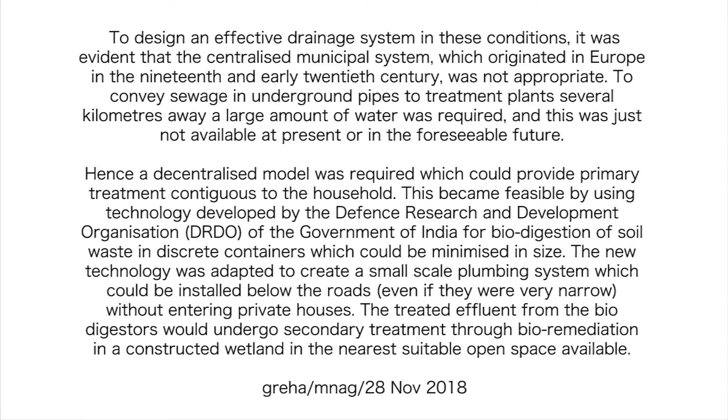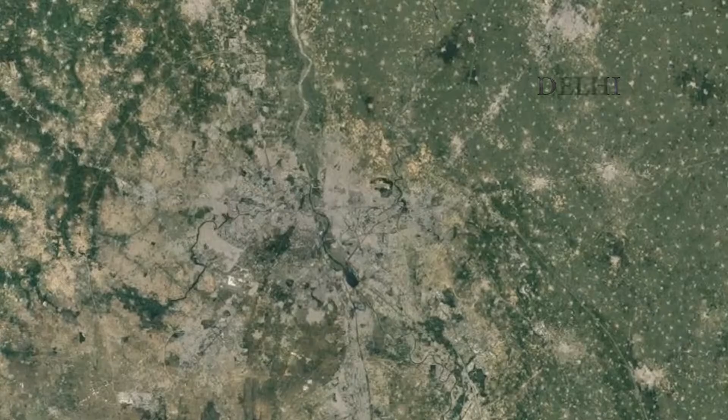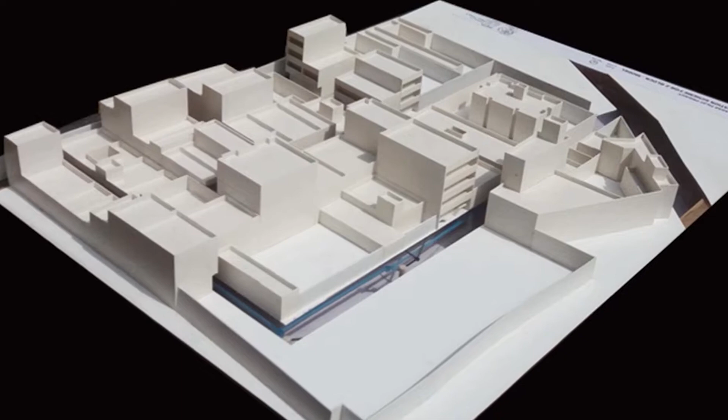Aya Nagar is located on the southwestern edge of Delhi. Z Block is a dense urban neighborhood of Aya Nagar, housing about 300 families. The neighborhood was surveyed and accurately modeled to inform the residents about the scheme.

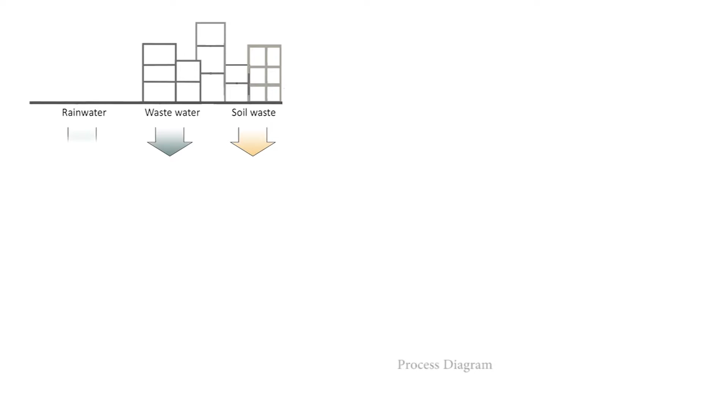The process of water cycle management starts with soil waste treated by biodigesters, discharging to a grey water main, with secondary treatment by a reed bed before recycling.

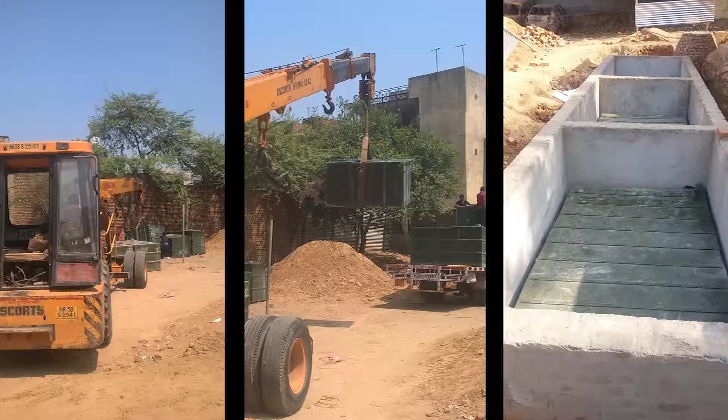Biodigesters are installed under the roads. These are specially designed and fabricated using a patented system developed by the Defence Research and Development Organization of the Government of India. This technological innovation allows for a decentralized distribution of biodigesters with minimum water requirement for flushing.

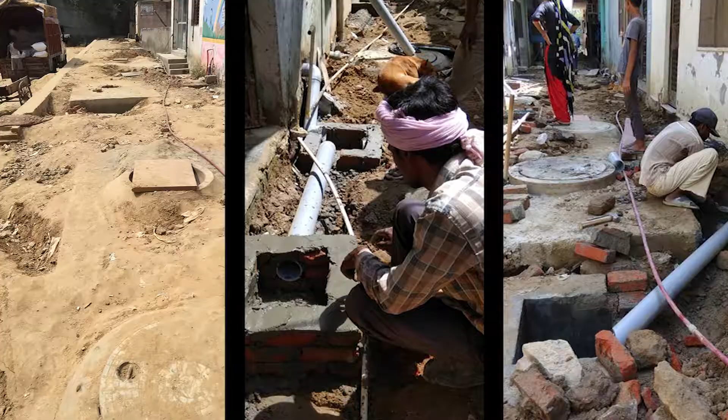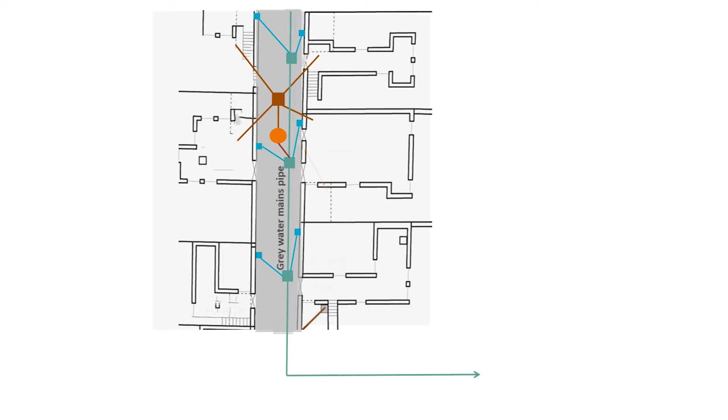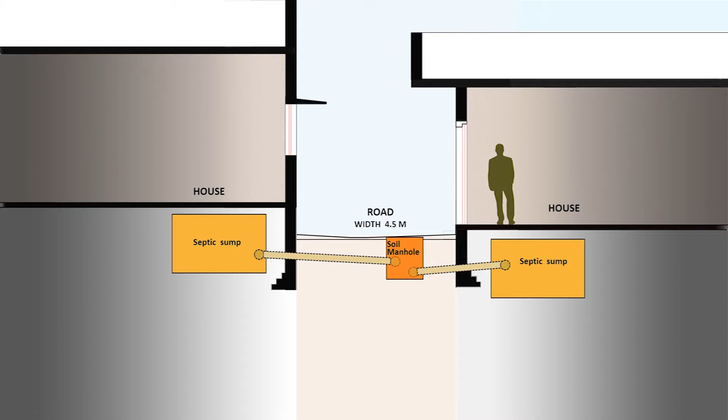Septage is treated nearest the source, and treated effluent is discharged to a grey water main connected to a reed bed before recycling. The entire treatment system is accommodated under the narrow roads, maintaining a domestic scale.

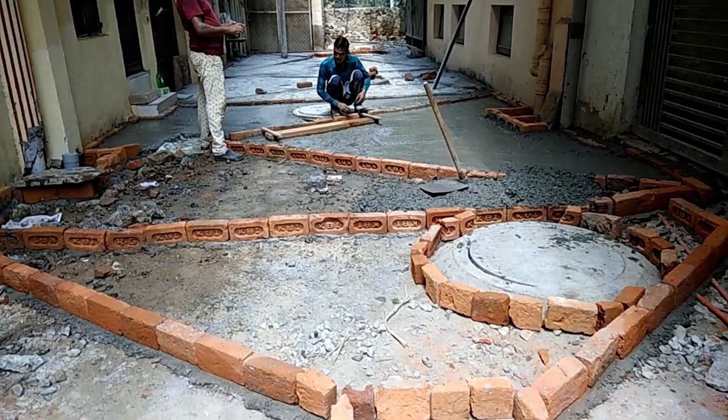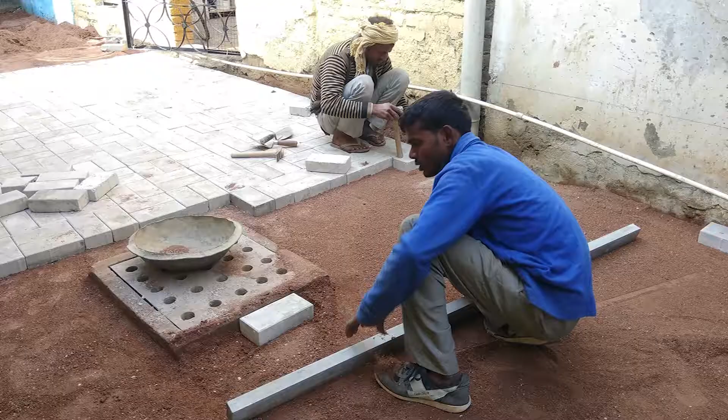The roads are repaved to harvest rainwater along with the surface water. Concrete block paving completes the renewal of the streets.

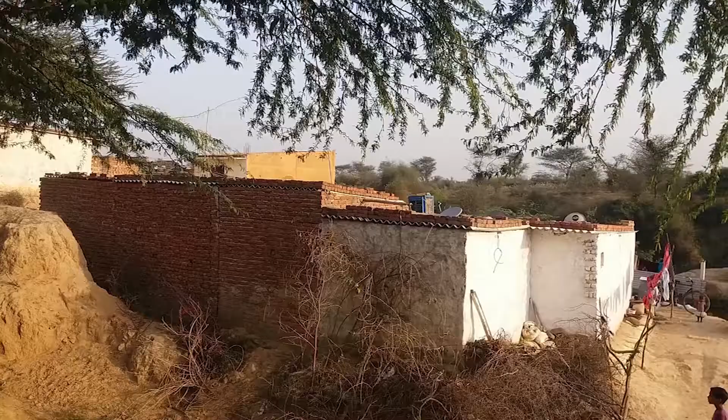On the forest edge of Aya Nagar is G and H Block, where biodigesters were installed in individual households. There were no roads here. Detailed consultations were held with householders to position the new toilets according to their needs.

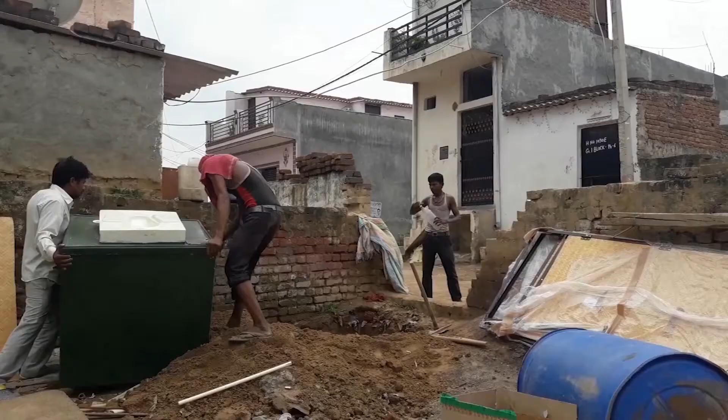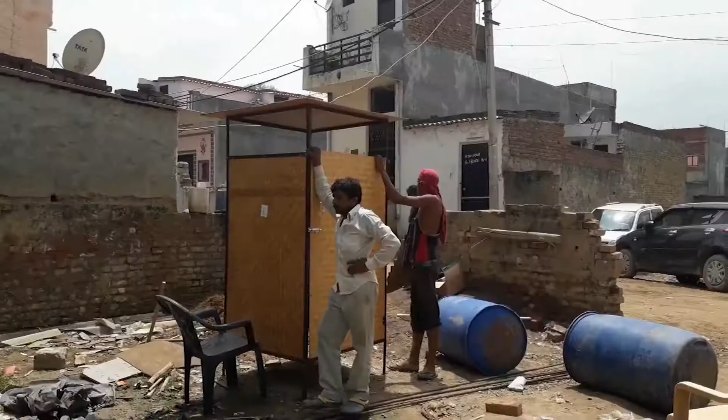Biodigesters designed to fit in small houses were installed in open spaces of house plots. A specially designed shelter fits above the biodigester to provide privacy and security.

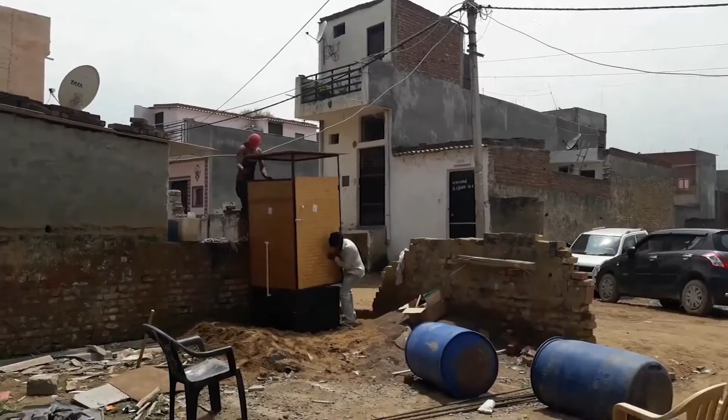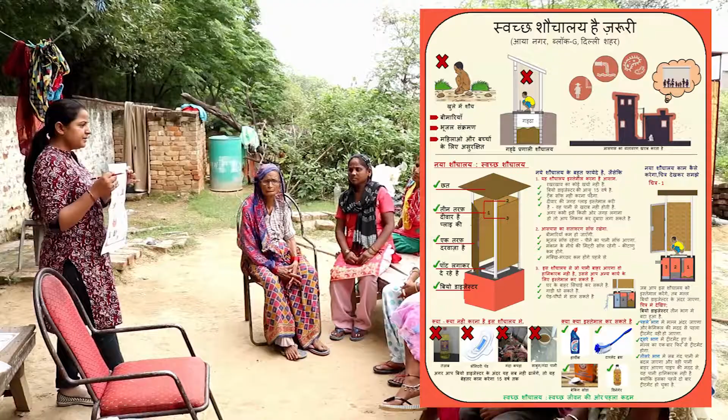The householders were trained and informed about the use and maintenance of their new systems.

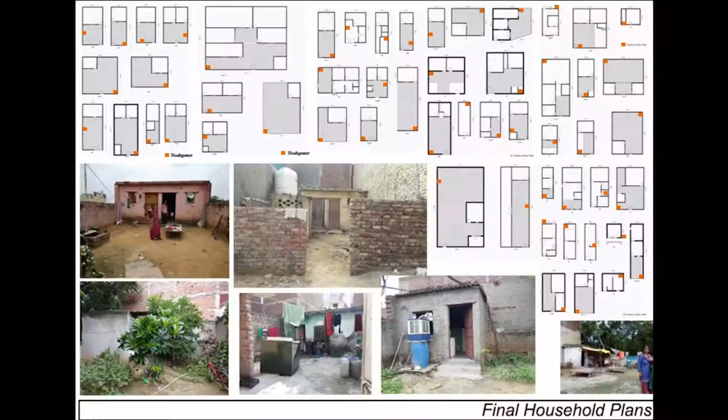55 houses were provided with biodigester toilets, 27 in the first phase and 28 in the second phase, all in satisfactory use since September 2017.